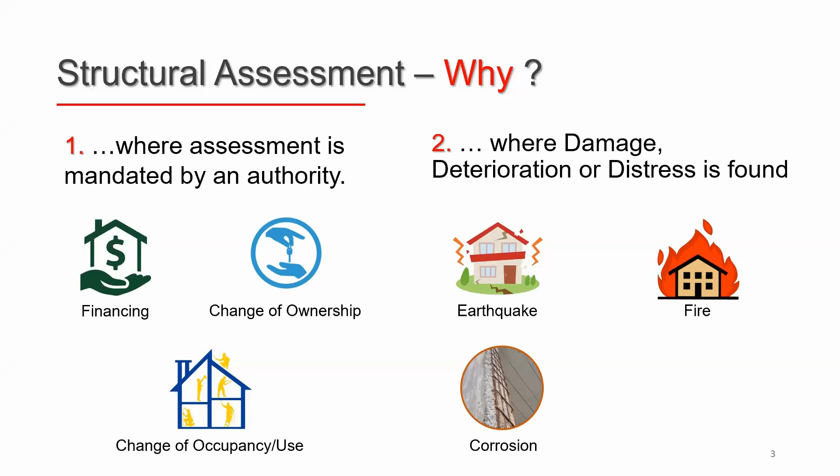The other area that requires structural assessment is after having an incident such as an earthquake or a fire, or when a natural process of aging of structures results in significant damages to the facility.

According to the Professional Engineers Ontario guideline for structural condition assessment, we have four main elements when we are performing a structural assessment. It is about collecting observations and data about the existing building through a systematic and scientific method. So these are very important.

Observation - most of our assessments start with visual inspection, like developing an eye to see anomalies within a structural system. Collecting data, and that is by any means - you can have destructive tests, you can have non-destructive tests, and you can have laboratory test results to bring more information and more data.

But all this doesn't mean anything if you don't do this in a systematic and scientific manner. So it's very important to have a work plan to perform these assessments, and your methods have to be proven either in research or through guidelines and codes, if you want to have a structural condition assessment that stands when you're discussing with your clients, or presenting it to an asset owner.

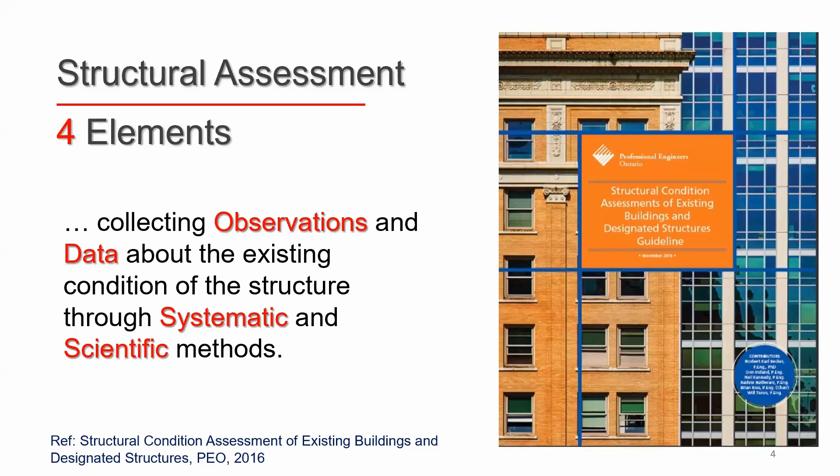So we talked about defects and damages to the facility, but let's see what a defect is. Based on the Ontario Structure Inspection Manual, a defect is an identifiable and unwanted condition that has not been part of the original intent of design. So let's say you design a facility, you don't want to see any type of cracks or voids. And now after removing the formwork, you see there is honeycombing, you see there is significant cracking.

Those are called defects because the original intent of design hasn't been to have those items included. Examples are like a lot of voids and honeycombing and discontinuities in new construction, and when we are dealing with an existing structure that has been exposed to several deteriorating mechanisms, then we will have corrosion, delamination, and things like that.

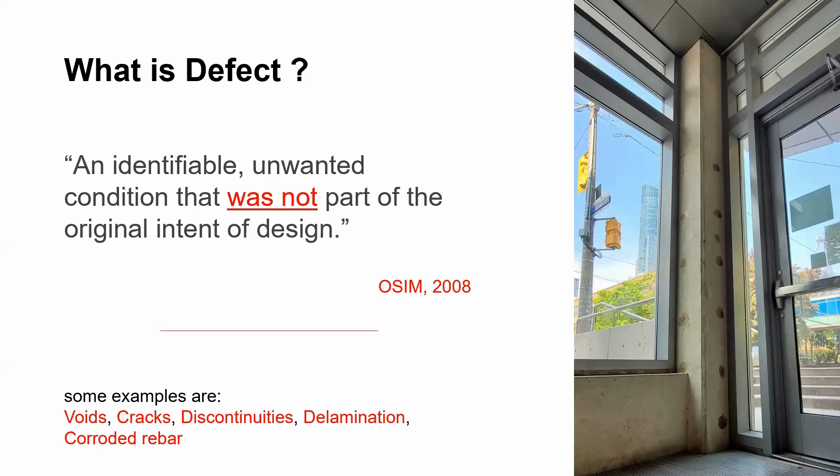These defects can have impact on the performance of the structure. The impact can be either aesthetic, just cosmetic, affecting the appearance of the element, which is quite important. Imagine walking in an underpass with significant cracking and delamination—people don't simply feel safe, even if you convince them that it is safe. It's just about the feeling of not being safe. Then you have durability performance, which is more about cracking, permeability, leaks. And then we have structural performance, where defects have negative impact on the strength and capacity of the structure.

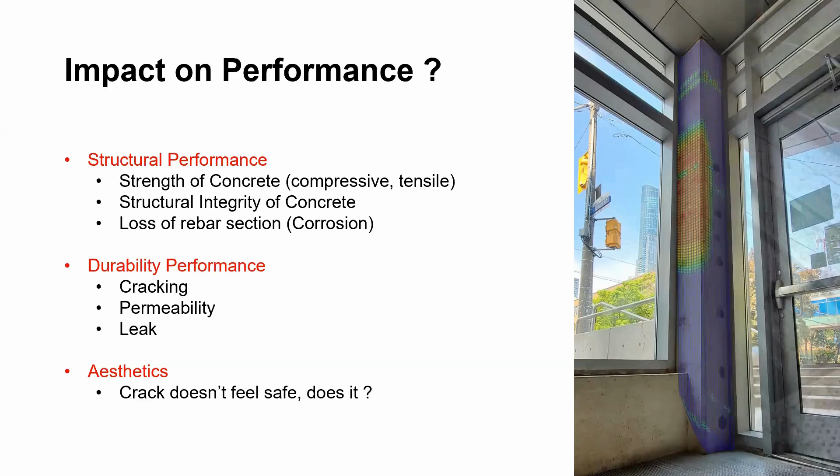But what information do we need when we are dealing with a structure? We need information about the characterization of materials, like strength—tensile strength, compressive strength. If we are dealing with a steel material, the yield strength of the steel. If we are talking about structural integrity of concrete, we are talking about continuity, and whether the cover thickness matches the design recommendations or not.

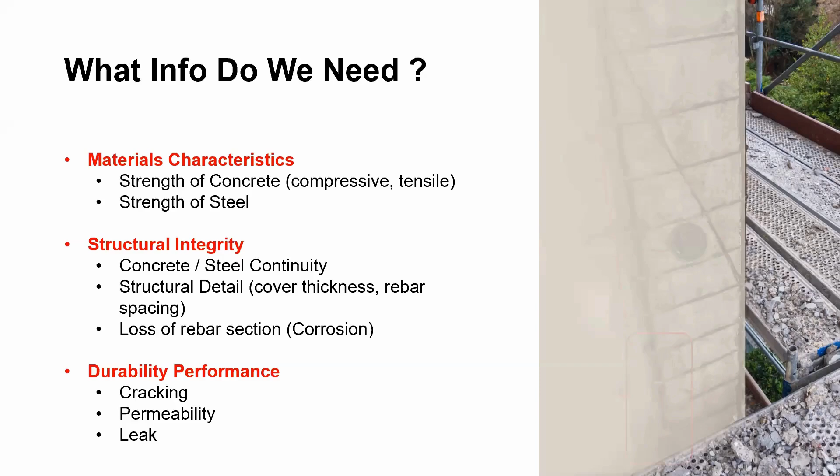How can we get this information? I have a quick example here. This is an exposed concrete column, and these are the types of information you are looking to collect—information about the distribution of steel reinforcement in your concrete element. You want to know the rebar spacing. If, for example, you're investigating a structure in a high seismic zone, you want to see if the stirrups in the plastic hinging zone conform with the new guidelines and codes.

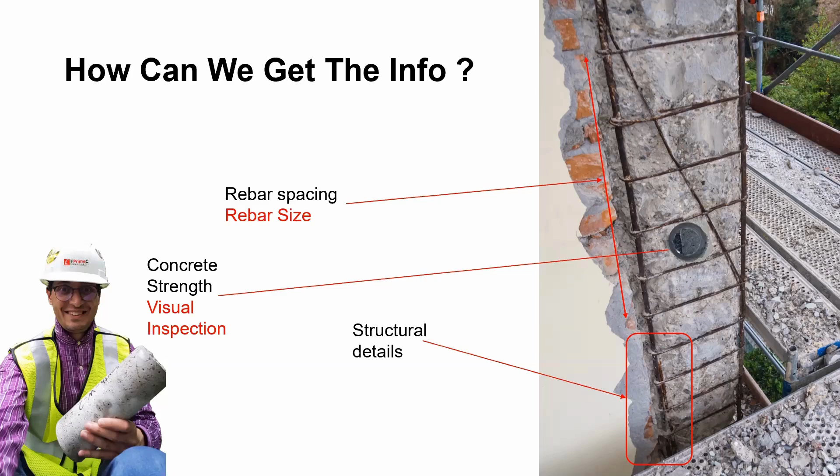This is especially important if dealing with a structure that is designed substandard, like an older structure. Then you also want to visually examine the condition of steel reinforcement—is it corroded, is it small in sizing? And also other details, such as taking cores from concrete to evaluate the strength of concrete.

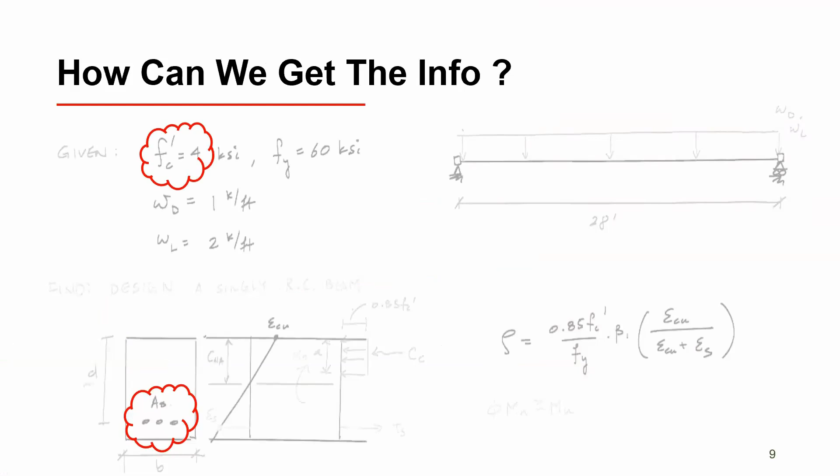When dealing with concrete structures, there are certain parameters that are more significant and more interesting from the perspective of engineers, like f'c, the compressive strength of concrete, and the number of rebars you might have. This gives the structural engineer information they need to come up with a structural assessment. So how does the structural assessment work? We have two main categories here.

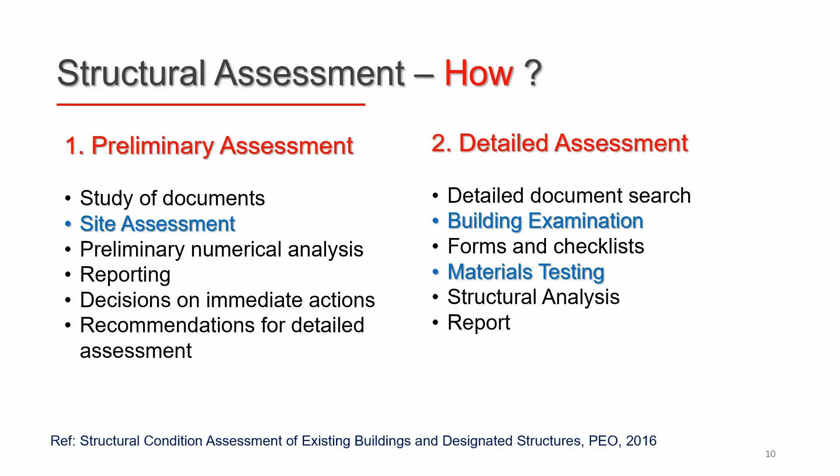We have preliminary assessment, which is mainly visual inspection of the structure, identifying defects. Then we have detailed condition assessment, where you go with your team, and depending on what type of structure and facility you are testing, you might come up with an intrusive test plan, or a non-destructive test plan. The purpose is to collect information in a systematic way that we discussed earlier.

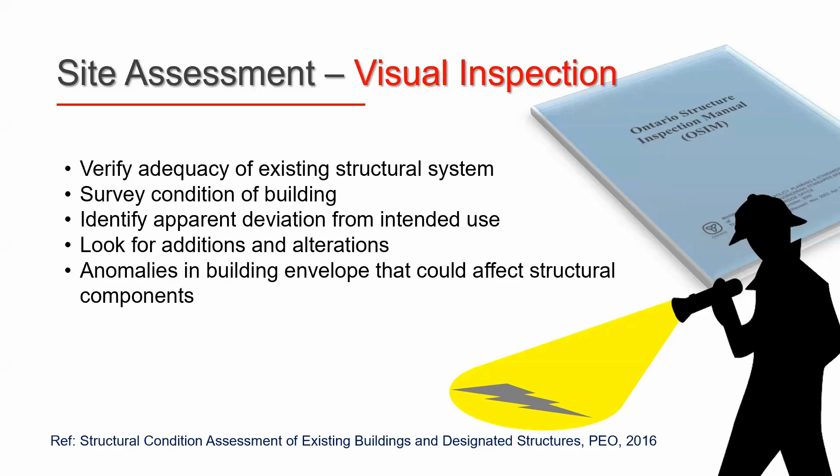Visual inspection is always first, because it's still one of the most cost-effective solutions, and it gives us an idea of the extent of defects, the area that needs proper inspection, and information about where to begin our more detailed and enhanced condition assessment.

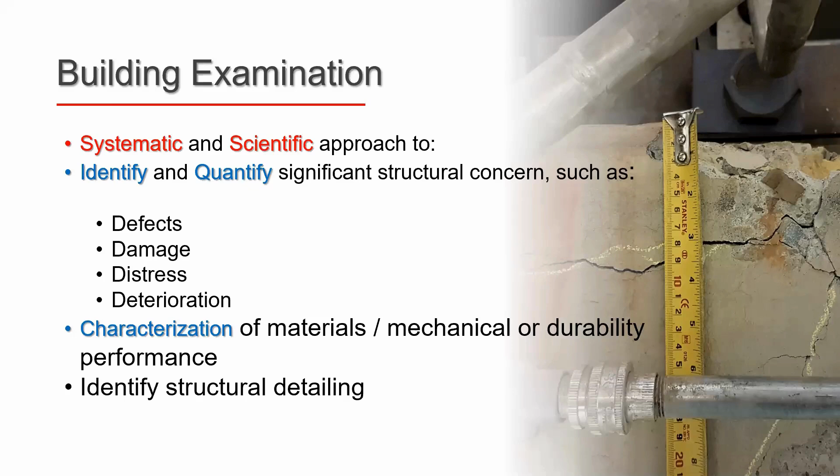When it comes to building examination, our goal is to identify potential defects and also quantify their extent and severity in a structure. Let's say we have a crack in concrete—is this crack significant? Is it going to negatively impact the structural integrity of our assets or not? Is it a sign of only durability concern, or is it coming from an element being overloaded? These are pieces of information we always want to gather.

Traditionally, we used to perform destructive testing. It is still one of the most widely used methods in the market. Most codes and guidelines still heavily rely on results from destructive testing—bring me the core and I will give you the strength, bring me the core and I will give you information about the durability of concrete. Our idea here is not to eliminate these tests. We want to say that non-destructive tests have something that can help you minimize the number of corings and cuttings in concrete.

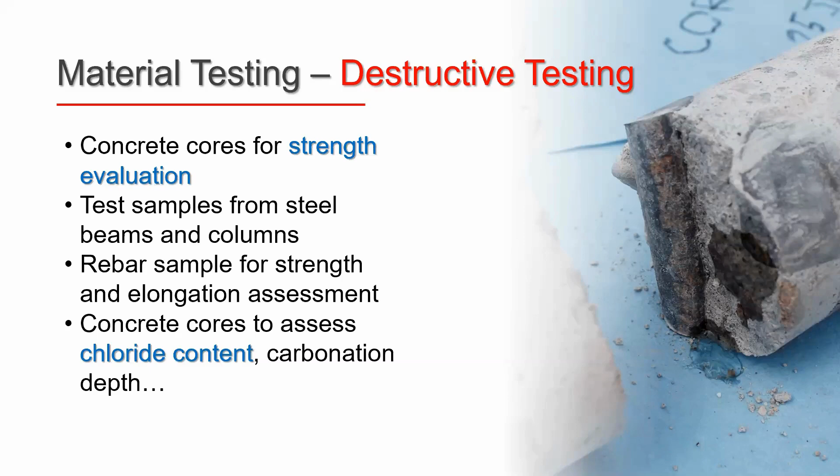This is especially important when dealing with an existing asset that is not in very nice condition—it is already damaged. The last thing we really want is to make another dent in the structure. So we want to see if NDT, in a cost-effective manner, can help engineers collect the information they need without necessarily doing the difficult job of taking core samples. With this, I'll start chapter 2 of this presentation, which is non-destructive testing—and this is what our firm has mostly stood for over the past few years.

With non-destructive testing, we want to show you how NDT can help you collect some of the information that is necessary to making critical decisions about approving or rejecting a new concrete construction, or basically when we are dealing with an existing structure, if the structure actually can stand and has the capacity to get the loadings that are designed for.

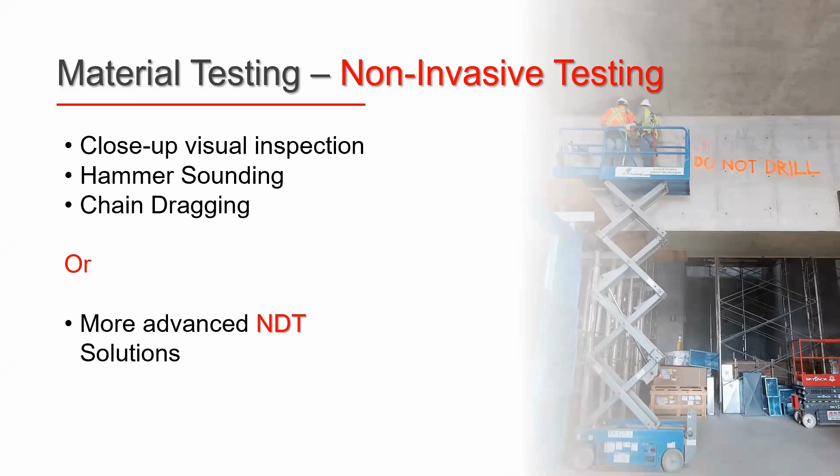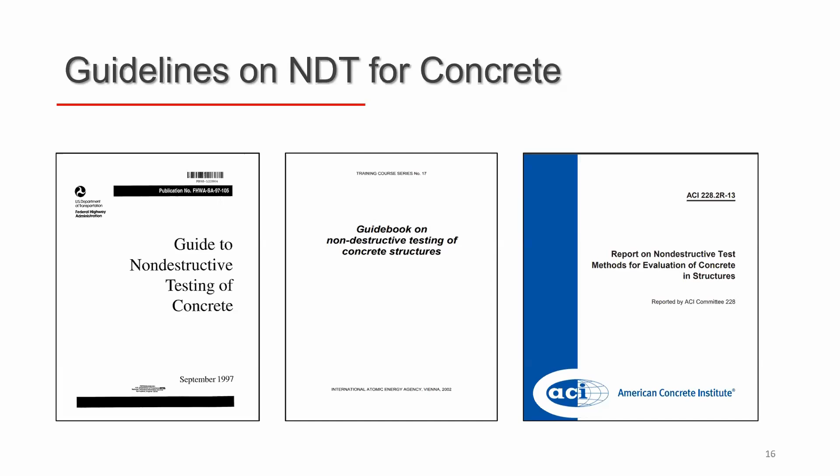In this presentation, we will review some of these test methods, from mechanical to electrical methods, acoustics, electromagnetic based, thermal methods, and electrochemical methods.

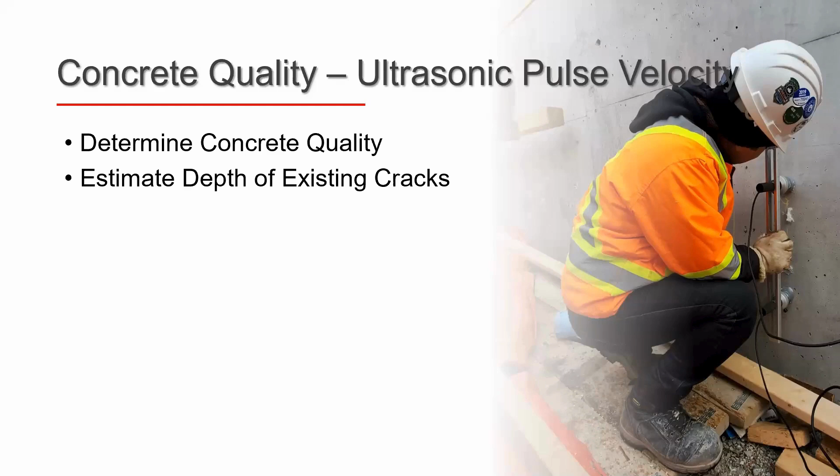So let's start with ultrasonic pulse velocity. I always enjoy having this as the first in line because I see this as a very good intro to the field of NDT and how these techniques can help structural engineers. Ultrasonic pulse velocity is a great tool if we want to determine the quality of concrete in a laboratory or in the field.

So how it works: basically in ultrasonic pulse velocity, as you can see in the image on the right, we have two probes. One is the sending transducer and the other one is the receiving transducer. By knowing the distance and measuring the arrival time of the signal, we will be able to measure something that is called pulse velocity.

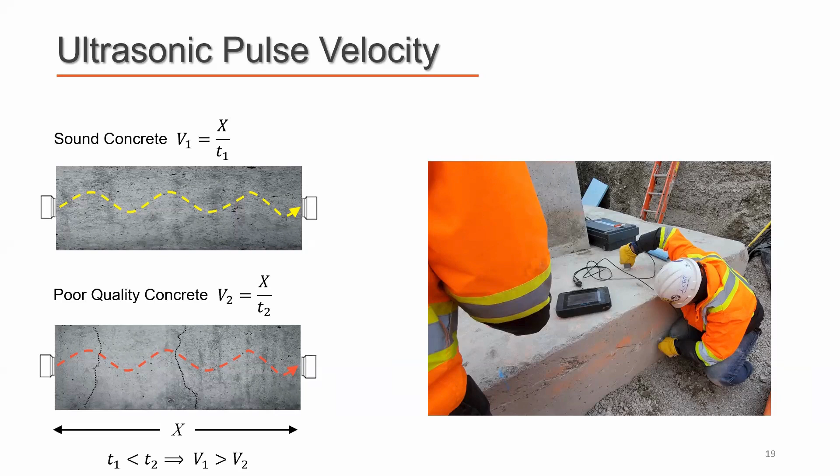Now, if we do have cracks or defects in concrete, we expect that the arrival time of the signal becomes longer. So it means that a poor quality concrete should have a lower pulse velocity. This gives us a very good benchmark to classify concrete materials.

In the next slide, I'm just going to show you visually how the test looks in a practical setup. As you see, here we are testing a concrete column, and we want to see if ultrasonic pulse velocity can show us if there are any major defects in the concrete element.

In this one in particular, we are not doing conventional laboratory UPV. We are doing it in a field setup, and we expect that the presence of steel reinforcement might have some influence on the readings. So we want to extend the test beyond its limit to see how far ultrasonic pulse velocity can go in providing information about the quality of concrete and also the presence of potential significant voids or defects.

And if you don't, and you are testing concrete elements like this one, and you have access to only one side of an element most of the time, or two sides in an edge element, then you have to go with semi-direct or indirect methods.

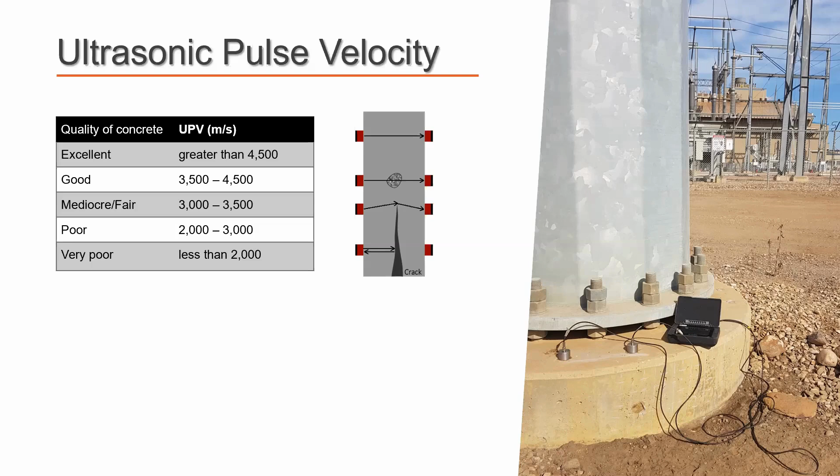Now, for having good and meaningful results, you have to avoid putting your probes over the steel reinforcement. So it's always good to use a device to find the approximate location of rebar, to avoid direct placement of sensors on the reinforcement as much as possible.

The other technique that is widely used in the market is rebound hammer, and rebound hammer is a matter of debate between many engineers. But recently there are newer documents and research that show if you use the hammer in a proper manner, the results can actually help you collect very meaningful results about the quality, uniformity, and strength of concrete.

For this, there are different reports that can help you. The most important one in North America will be the ACI 228.1R committee, about in-place concrete strength, NDT for in-place concrete estimate. Rebound hammer is one of them. When you combine the results of rebound hammer with ultrasonic pulse velocity, you can even further enhance the results. In the next few slides, I'll show you how.

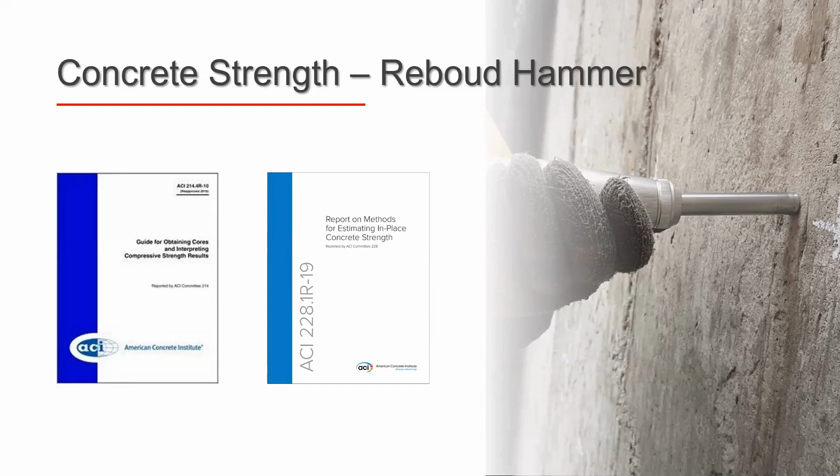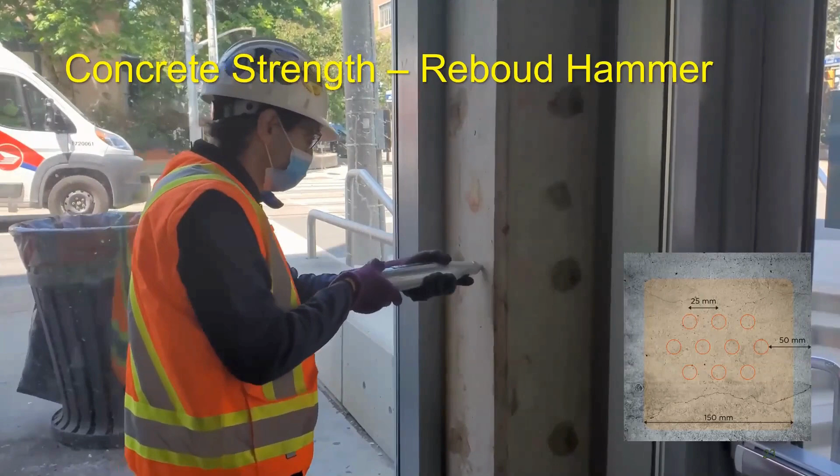Rebound hammer, as you can see in this image, is a pretty straightforward test to do. At each test point, you have to repeat the test a minimum of 10 times, and then use the average of 10 readings to come up with an idea about the rebound number of the element.

Traditionally, we used to correlate this number to the strength of concrete. We know that that is now no longer 100% valid. So right now we recommend that people use more project-specific calibration curves to correlate the rebound number with the strength of concrete.

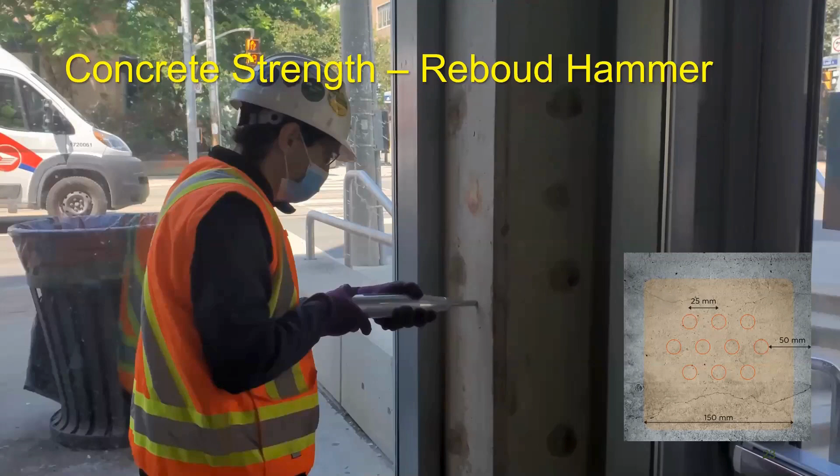But it is also worth noting that there are new codes, like the Euro norm code, that you can use the rebound hammer number to classify the strength of concrete, which will significantly reduce the amount of coring that you might need in a large-scale project.

If you remember, I talked about combining the results of rebound hammer with ultrasonic pulse velocity. We did a very interesting job in a couple of projects in the GTA area where clients were very hesitant about taking cores. So we came up with the SonReb method, an alternative NDT approach to assessing strength of concrete. One of them was a footing element in a project site in the Toronto area, and the client was interested in verifying the strength of concrete.

No coring was permitted, so there was absolutely no way to take concrete cores. So we performed Schmidt hammer tests and UPV tests, and combined the results together using mathematical formulations to come up with a map of strength variation.

This helps see if a large area of concrete meets the minimum requirements of concrete strength or not. So if you have a 30 MPa design consideration and you're actually at 25, this technique can help you identify the locations that might potentially be substandard.

This saves time when you have to perform remedy work or are forced to remove poor quality areas. We did, in a very similar setting, a very interesting project on a large scale concrete slab, which was exposed to extremely cold temperatures after casting.

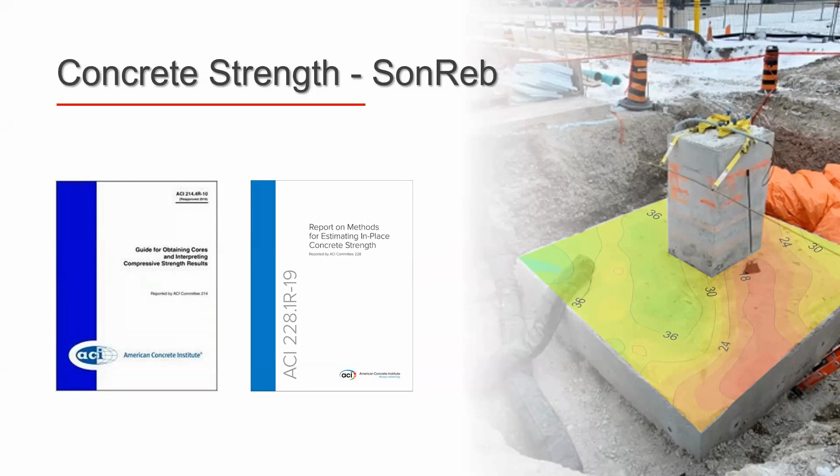In this project, even though the whole purpose was to avoid and minimize the number of corings, 8 cores were taken from the 400 square meter slab, and out of those 8 cores, 7 cores were within 90% of the results from the core. So pretty interesting and pretty accurate those tests were.

Another test that is very useful for structural assessment is ultrasonic pulse echo. We deal with a lot of structural systems that engineers only have access to from one side - examples are when evaluating trunk sewers, concrete linings in tunnels, or concrete tanks in water treatment facilities.

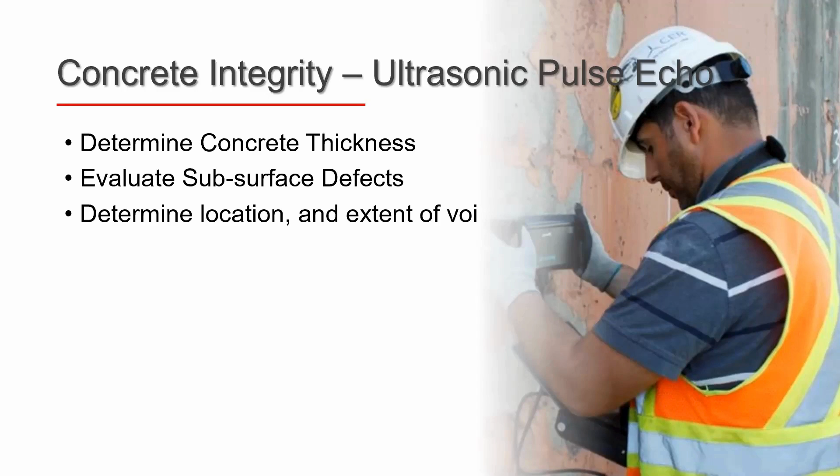These are elements we only have access to from outside most of the time, or only from inside if it's an underground tank. So we have to have tools that can provide information about the quality and integrity of concrete with only one-side access. Ultrasonic pulse echo is one of the great tools that helps engineers in practice.

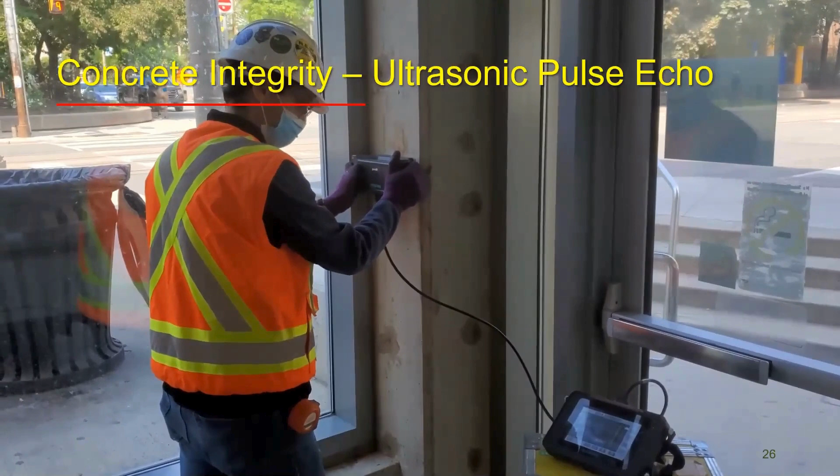And the practice is quite simple. If you have the right tool, you'll be able to evaluate the quality and integrity of the layers, and see if there's any major delamination or discontinuity in the concrete element. At its most basic use, you can use UPE to verify the thickness of an element.

Let's say you have a bridge abutment 40-50 centimeters thick, and you want to see if the element meets the design requirement. In more advanced applications, you want to see if there's any void or significant anomalies within the concrete at depth, and the test provides very useful information.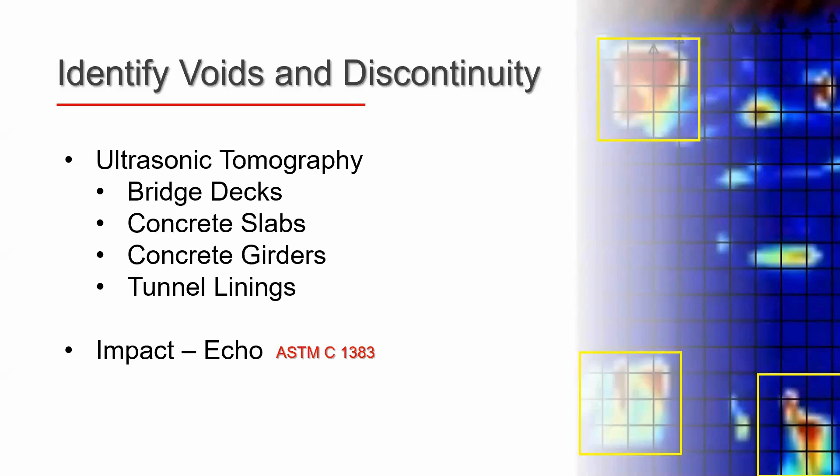This technique can also be used in ultrasonic tomography, for bridge deck assessment, concrete slabs, parking garages, and tunnel linings. Another test in this group is impact echo testing - again, when you have only one-sided access to an element, you can use impact echo to verify the integrity and quality of the concrete material.

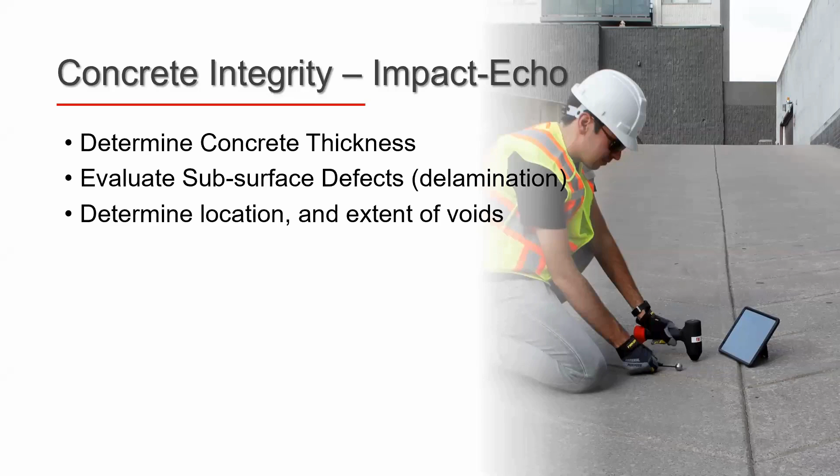It uses a stress wave method to verify the thickness of concrete components, and also to check if there's any delamination or discontinuity in a parking garage slab or bridge deck slab. The test method helps engineers identify those anomalies in the structure.

Another interesting test, which is very popular among people involved in concrete inspection and testing of structural systems, is ground penetrating radar. GPR traditionally has been used in soil investigation. In concrete, it's a little different, but it provides great information.

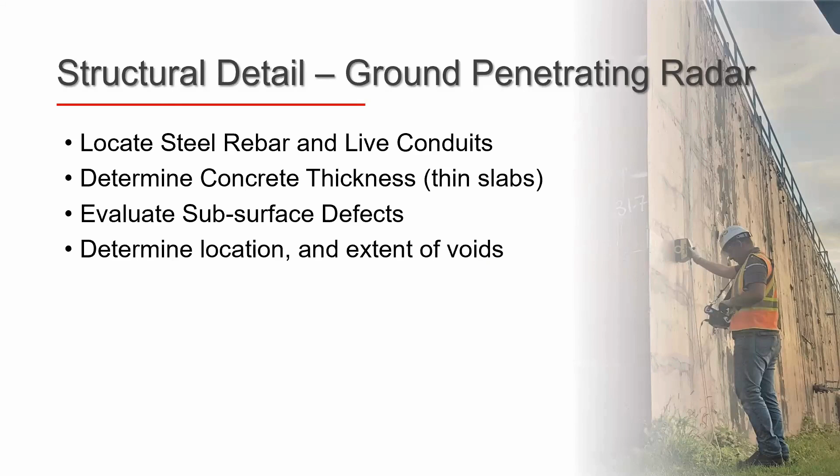Nowadays, most cutting and coring companies are equipped with different sorts of GPR units, which helps them verify the location of steel reinforcement ahead of drilling, so they avoid cutting steel reinforcement or live conduits in concrete slabs.

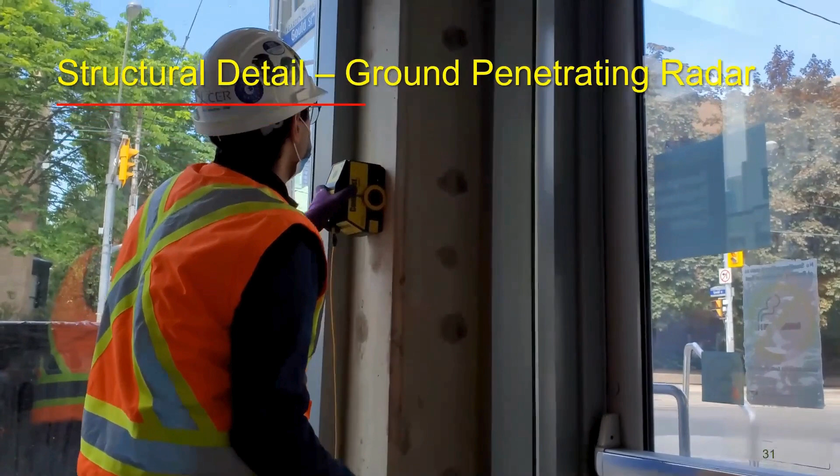In its most basic application, GPR can be used to identify the location of steel reinforcement. If you have the capability to calibrate the test results, then the results can be used to get an estimate of the depth of the steel reinforcement.

Time to time, I've been asked if GPR can provide information about the size of steel reinforcement. That's a little tricky at this point—GPR doesn't really directly provide information about the size. Although, if you have a steel rebar or steel beam in the concrete element, from the type of response you can pick up those variations. But at this stage, it's very difficult to come up with an idea about the size. The result of GPR is the location of steel bars.

So if you're planning to drill a hole, you'll make sure that the area between the rebars is the most appropriate location to put your drilling machine. If there are ducts or cables in the concrete slab that you want to avoid, this is another application.

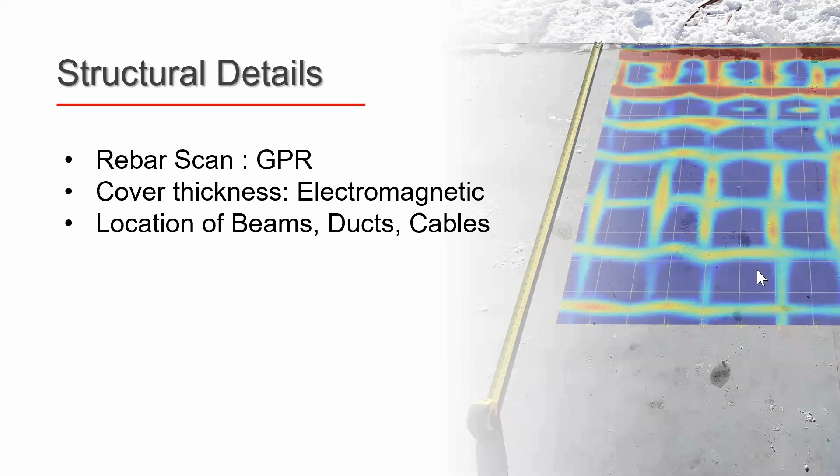Another group of tests I'd like to talk about is half-cell corrosion potential. This is a great tool to verify corrosion activity in concrete structures. It's widely used for pre-bridge deck condition surveys, but it's also very useful in parking garages, especially if they're exposed to de-icing agents such as salt.

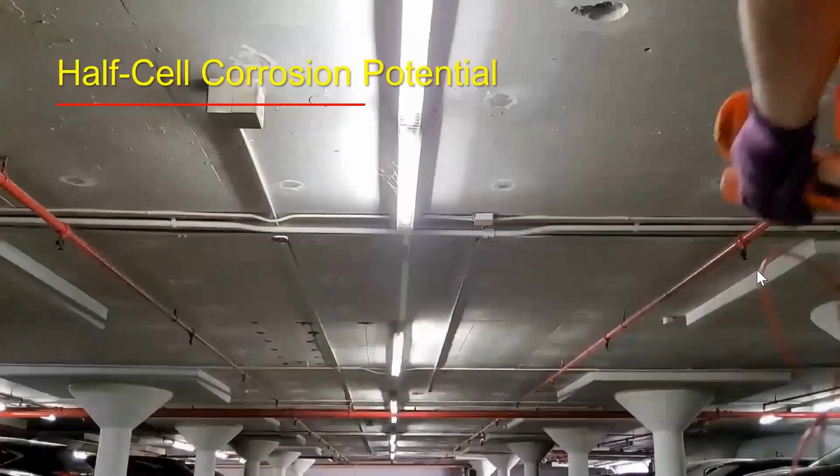Half-cell corrosion potential maps, when developed and interpreted properly, can help engineers identify the likelihood of active corrosion in concrete elements. For your review, I have a short video on the process. You normally take a reference connection to the steel reinforcement, then perform the testing on several points on a concrete slab.

The results can be presented as a contour plot, often called a half-cell corrosion potential map. This map can be interpreted such that when results are more positive than minus 200 millivolts for a copper-copper sulfate electrode, the chance of active corrosion is less than 10%. If it's more negative than minus 350, the chance of active corrosion—like in the red zones—is more than 90%. The test remains uncertain for the range between the two.

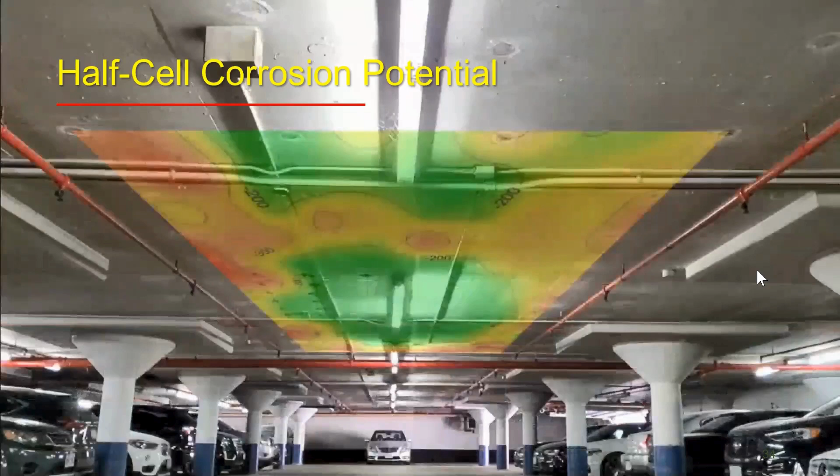So you have to always handle the test results with extreme care. There are other tests in this category that can help structural engineers collect more information about corrosion and the durability performance of concrete. Surface electrical resistivity of concrete is certainly one of the best methods these days to verify durability parameters. Corrosion rate measurement, if you're dealing with service life modeling, can provide useful information for planning, and of course carbonation depth.

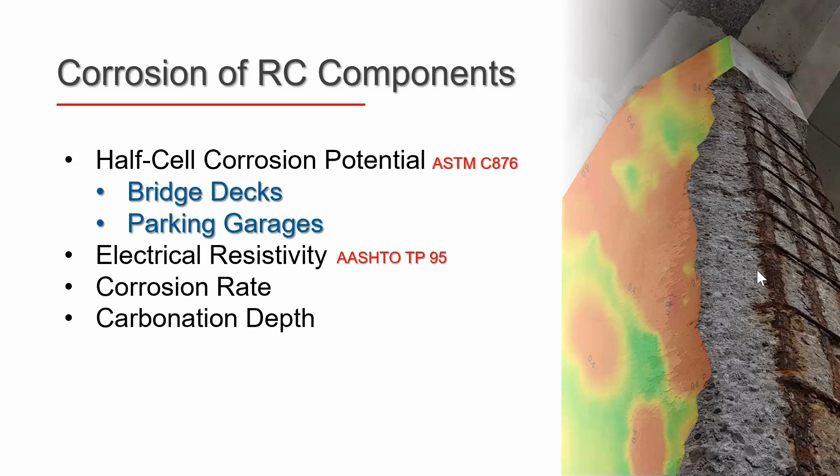When you have a structure exposed to carbonation, these tests are relatively NDT—not entirely NDT, because as you saw, there's a need to open up to the steel reinforcement at some point and get the connection. But in general, the test is categorized as NDT.

With this, I'm going to bring this presentation to a close. The most significant remark is that NDT can help structural engineers in different ways. It can help come up with structural details—if you want to find the location of steel reinforcement or steel strands, GPR is a great tool. If you're dealing with an older building with many unknowns, GPR and pulse eddy current technique can help eliminate some of those unknowns.

You can use a bunch of NDT methods such as ultrasonic pulse velocity and the pulse echo technique to verify structural integrity of concrete. These are important for mechanical durability of concrete and other problems such as detecting voids and cracks. If you want to find the extent of defects, these NDT methods are extremely beneficial, so you can minimize the location of your repair and remedy work to areas that are really in poor condition.

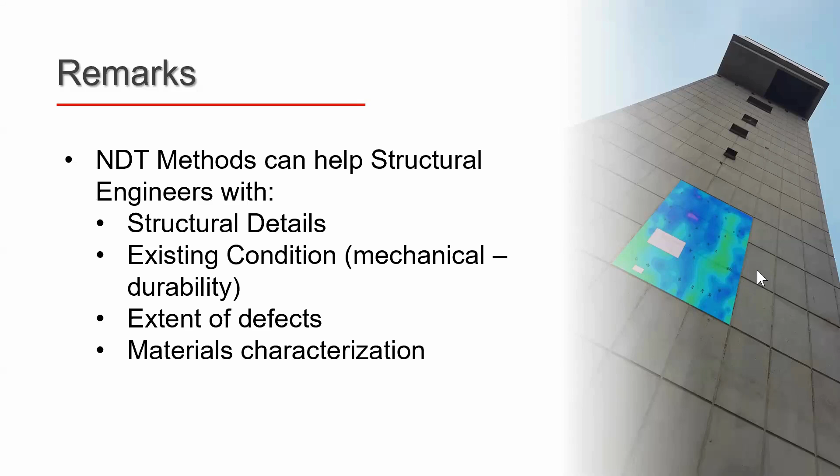And then material characterization—sometimes engineers want to collect information about the strength of concrete, and coring is not permitted. In these cases, engineers can use alternative NDT methods to come up with an idea about the strength of concrete. With this, I end this presentation here, and I'll open it up for questions.